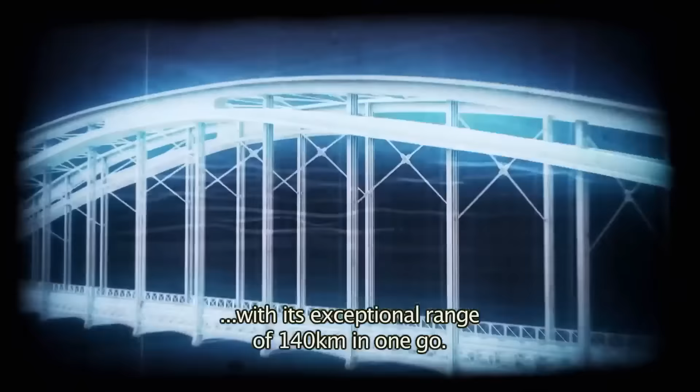The network has always benefited from the most innovative technologies. From the first wooden tunnels to chambers submerged in the Seine by freezing the ground, the construction, which began at the end of the 19th century, disemboweled Paris and boosted its performance.

As for the 400 trains, today they look nothing like the original wooden wagons. They are increasingly faster, more secure, automated and interconnected. The network has succeeded in its technological gamble and brought its historic lines into the modern age.

Today, the network continues to grow, but the building techniques have changed. The Paris Metro uses the most innovative methods to continue its growth. These include giant tunnel boring machines capable of digging more than 30 meters deep.

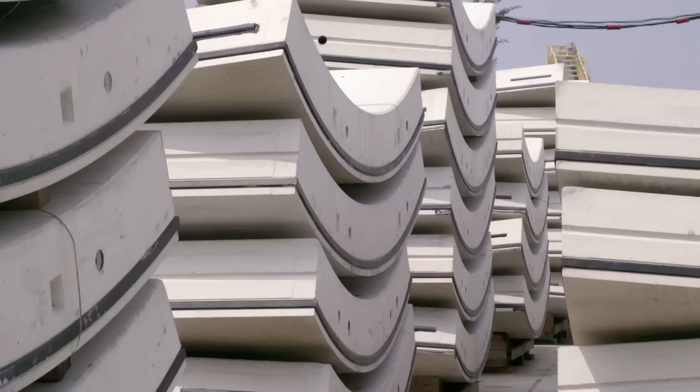We are in Saint-Ouen, on the site of the Line 14 extension, a titanic construction costing nearly €1.5 billion, situated in the heart of the city. Here, revolutionary techniques are used, making it almost invisible to the city's population.

The project will add 6 kilometers and 4 stations to the existing line, linking the Saint-Lazare station and the Mairie de Saint-Ouen station.

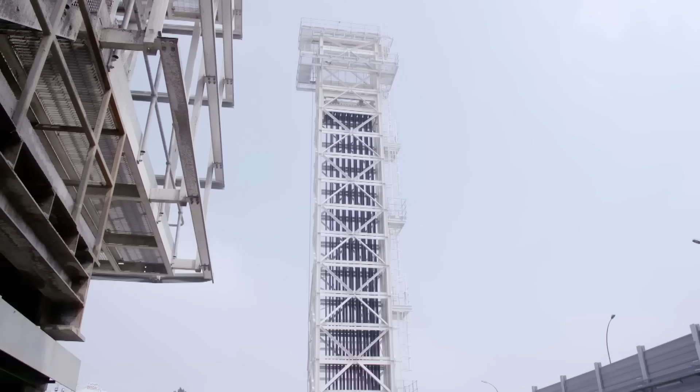25 meters below ground level, the tunneling machine, Seine, is hard at work. It has covered 400 meters so far. Its aim is to create a new section towards Mairie de Saint-Ouen station.

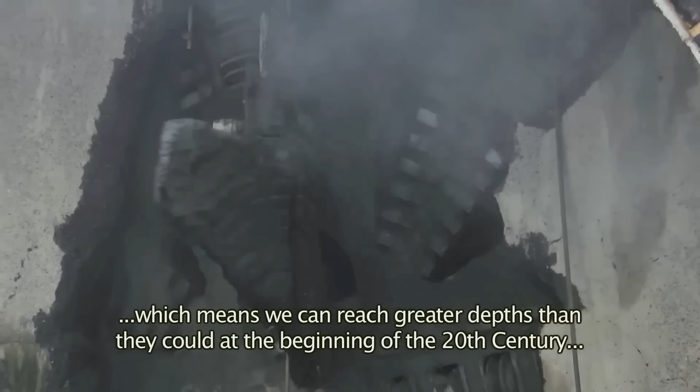Thanks to modern tunneling machines such as this one in Saint-Ouen, developed by a French company, the construction goes a lot faster and the workers have given way to machines.

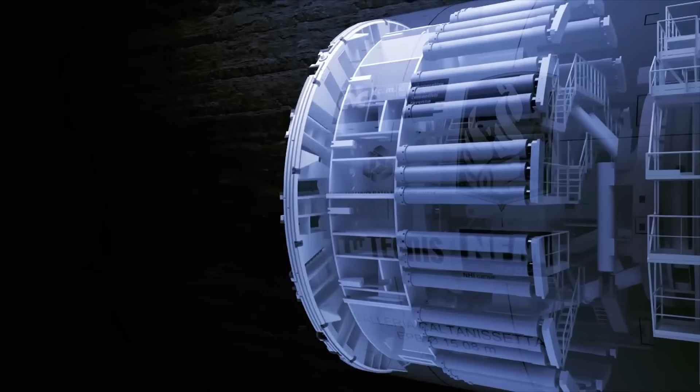The tunnel boring machine, at 100 meters long and 9 meters wide, is able to exert 7,000 tons of thrust against the wall it devours. Completely automated, the Seine can dig and construct the tunnel at the same time.

At the front of the machine, the head, equipped with its numerous teeth, operates on the rock exactly like a drill bit. The cutting head eats away at the earth. The rubble is then routed outwards with the help of an Archimedes screw, a giant feeder screw.

The debris, saturated with water, is carried outside of the site on a conveyor belt. Stored in a reservoir, it is then taken away in lorries.

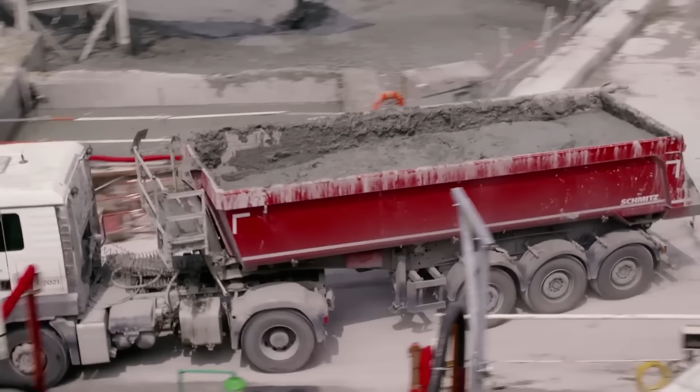At the same time that the earth is removed, the voussoirs which will form the tunnel walls are lowered into the starting well. They continuously supply the work of the boring machine.

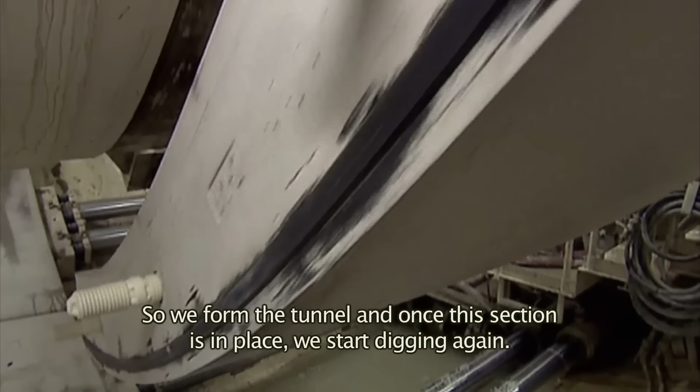Following the advancement of the tunnelling machine, a mechanical arm places the voussoirs one by one in a precise order. Assembled together, they will form the structure of the tunnel.

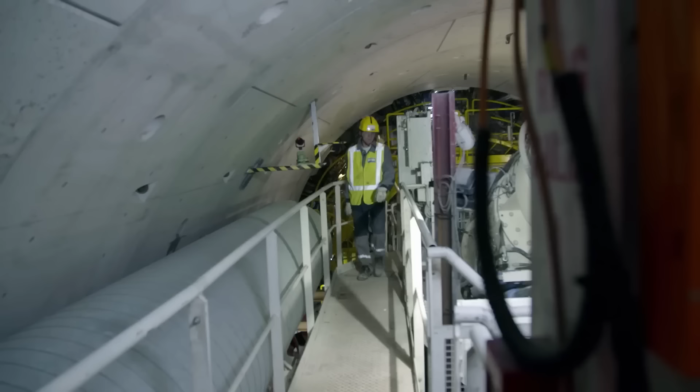The Romans used stone voussoirs to construct their arches. Like a giant puzzle, these prefabricated concrete parts weighing 6.5 tons fit perfectly together to form watertight walls. On this extension of Line 14, it will take 7 to form a tunnel ring.

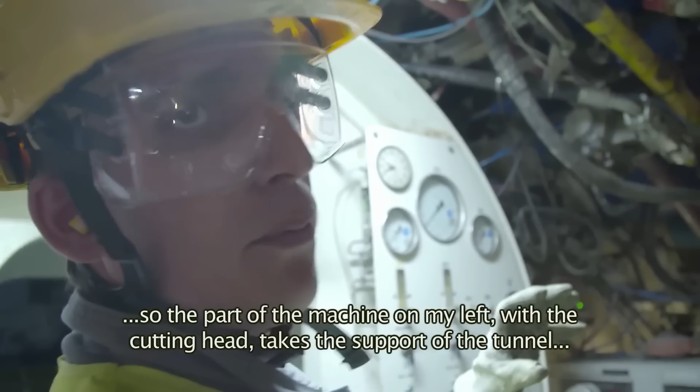No propulsion is required to move the machine forward. These hydraulic jacks allow the machine to lean against the voussoir that it installs and applies pressure which moves it forward. The tunnel boring machine at Saint-Ouen advances 200 meters a month towards its final target, situated more than 5 kilometers away.

The speed must be adapted according to numerous parameters, including the type of earth and the diameter of the borehole, similar to a drill that you don't want to overpower for fear that it might jam.

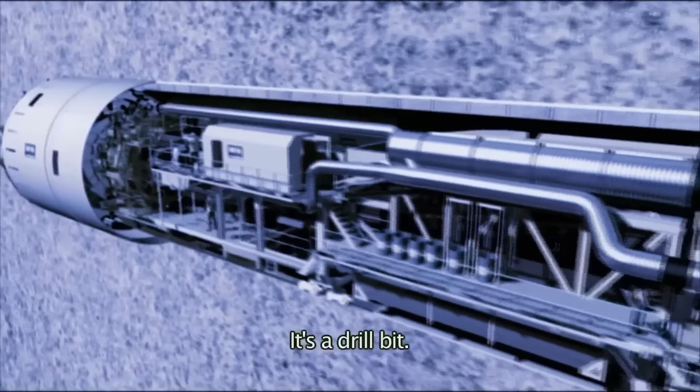We are far from the days of the horse-drawn buses which filled the capital and the 1900 World Exposition which saw the birth of the Paris Metro. Today, it is made up of 220 kilometers of track, 14 metro lines, 303 stations and more than 400 trains which run 7 days a week.

The Metro also has an unbelievable history which goes back nearly a century and a half.

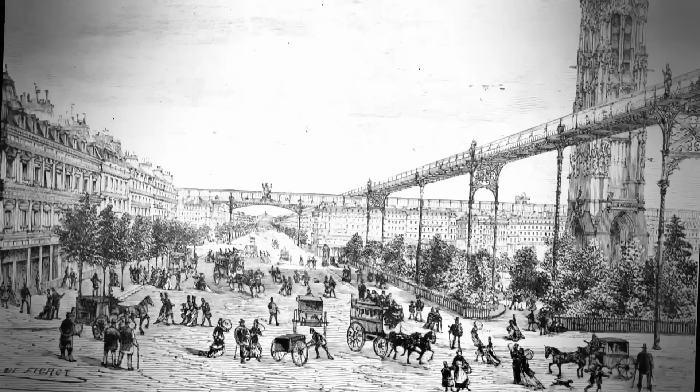This goes on for 40 years with no results. The Parisians will have to be patient.

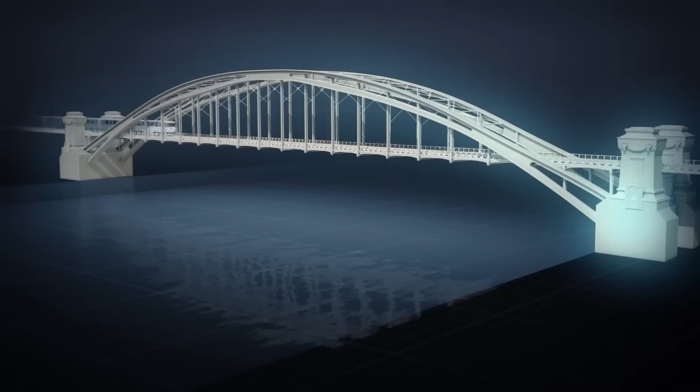As for the trains, they will be electrically driven and must not exceed the size of 2.4 meters, which would inhibit the running of normal trains.

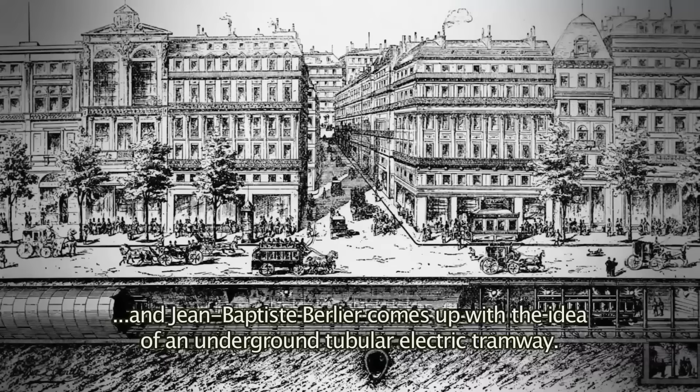Tramways have existed since the 1860s. First, there were horse-drawn tramways, then steam, and finally electric. The visionary Berlier imagines an underground tramway with a central rail which will provide the necessary electricity.

Finally, in 1896, a Parisian engineer, Fulgence Bienvenüe, is put at the head of the project. He is seen as the father of the metro. There is even a station with his name, Montparnasse Bienvenue.

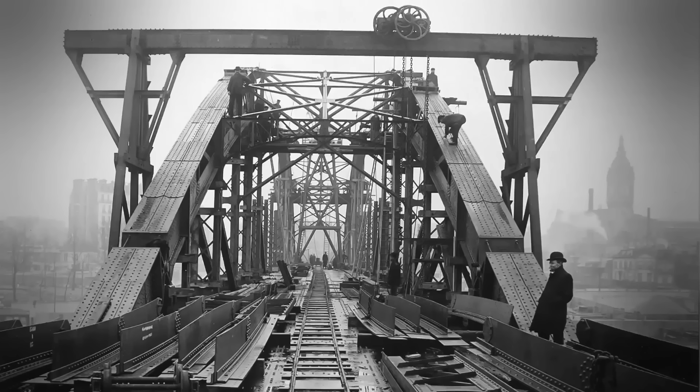In order to avoid interfering with river traffic, the navigation service demanded that it should have no supports in the middle of the river.

Situated 11.3 meters above the level of the Seine, the Austerlitz viaduct is made of steel. It consists of two large parabolic arches with three main joints, one at the top and two on either side near the riverbanks. The deck, which is 8.5 meters wide, is suspended from the arches by 16 supports in its center and 4 supports at its ends.

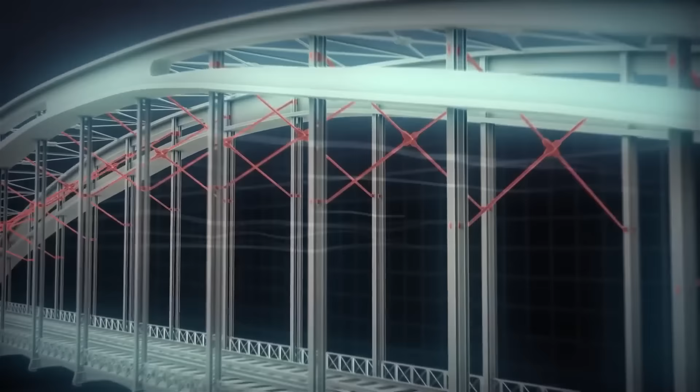To withstand wind force, the suspension supports are connected by crossed structures. To reinforce the structure, the arcs themselves are also connected together.

The selected project, therefore, outlined a viaduct with a single span of 140 meters, beating the 107.5-meter-long Alexandre III Bridge, which was until that point the longest in Paris.

On the banks, the viaduct arches rest on stone abutments, which are 22 meters long and 18 meters wide. Each of these blocks is surmounted by two 15-meter-high masts, which frame the deck of the bridge. A work that is truly extraordinary for its time.

In July 1906, the construction is finally completed. Line 5, which links Gare de l'Est to Gare d'Austerlitz, is in service.

It is one of 6 lines which make up the initial project, but already a second stage of works is planned. For the designers, the metro must be for everyone, and no person should be further than 400 meters from a station. It is for this reason that the first line to be constructed consists of 18 stations for only 11 kilometers of track. It is the transversal line from east to west, which departs from Porte de Vincennes to join Porte Maillot. It runs along the Seine for nearly half of its length.

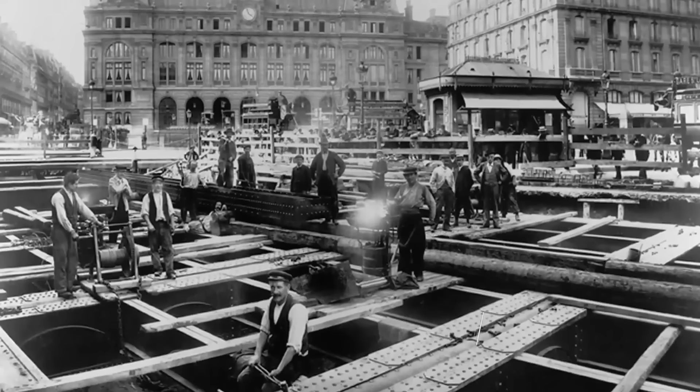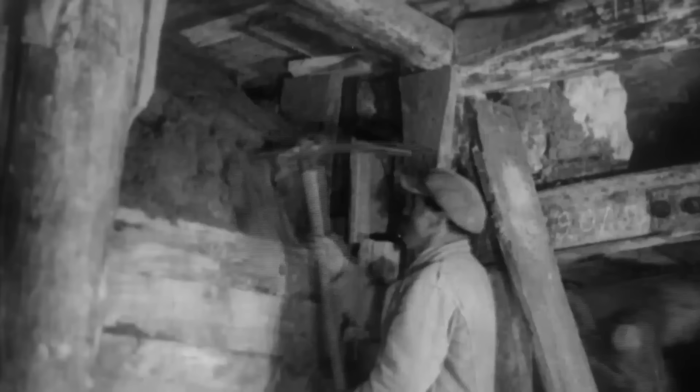This technique is used by all contractors in the construction of railway tunnels in particular. As in the mines, the digging is done by hand with a pick and shovel, grueling work carried out in extreme conditions. All the rubble is removed from the tunnels in wagons and transported to the surface. Some is used to refill Parisian quarries. As for the shafts, they are supported by enormous wooden beams, which also serve to create the shape of the future tunnel. Finally, still by hand, the vault is constructed from stone blocks, a work worthy of the construction of the pyramids.

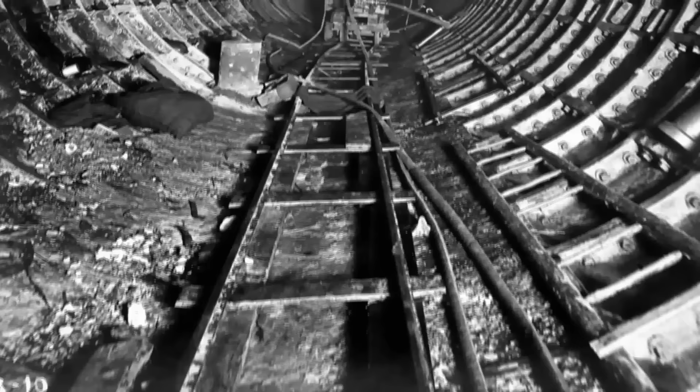In reality, the metal shield would not be used much on Line 1 because it is very slow, difficult to put in place, and stops as soon as it encounters a rock that is too hard. At the time, it was even sometimes necessary to dig by hand to move it forward in waterlogged terrain. These are the voussoirs placed one by one to create the tunnel ring. They are cast iron and positioned using a manual system. They give the tunnel its final shape. The shield concept truly is the ancestor of the modern tunnel boring machine, but this technique will take decades to be properly developed.

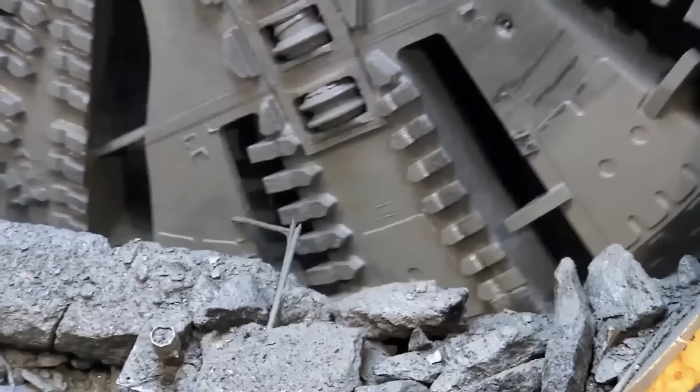It will take a century for a tunnel boring machine to be used again in Paris.

Today, it is hard to imagine the busy Rue de Rivoli in this state, and yet it is the hell that Parisians will live with for 18 months.

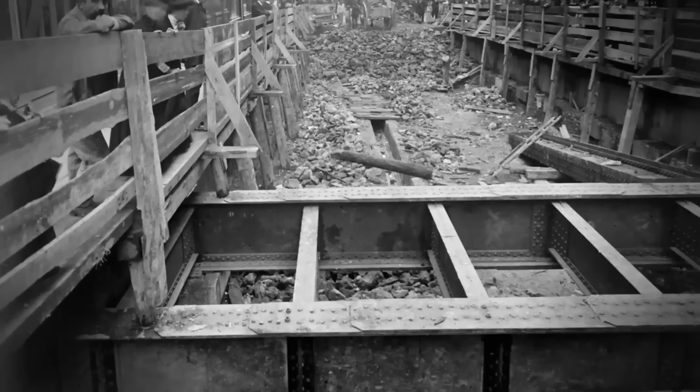This technique will be used near the Seine. Dug as shallow as possible to avoid leaks, the top of certain stations is sometimes only 60 centimeters from the wheels of the cars passing above.

The most advanced technologies were used in the electrification of the network. 2 coal factories were built to provide enough energy for this new means of transport. This requires colossal investments which already combine public and private money. It is the CMP, owned by Baron Empain, one of the financial giants of the 19th century, who takes on this formidable gamble.

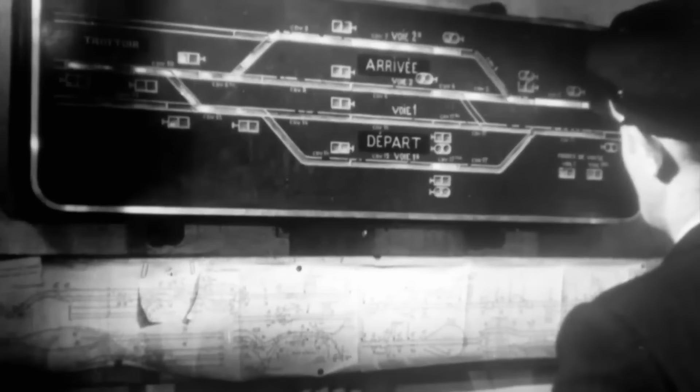A delayed reaction, which is not very reassuring for the passengers. To answer growing concerns about safety, the RATP implemented centralized command posts, a revolution made necessary by the growing development of this megastructure. In 1967, Line 1 is one of the first to be equipped with a centralized command post. 50 years later, it is the most modernized command post in the Parisian Metro.

With nearly 275 million people transported a year, the role of the Line 1 command post is paramount in order to respond to every situation as quickly as possible.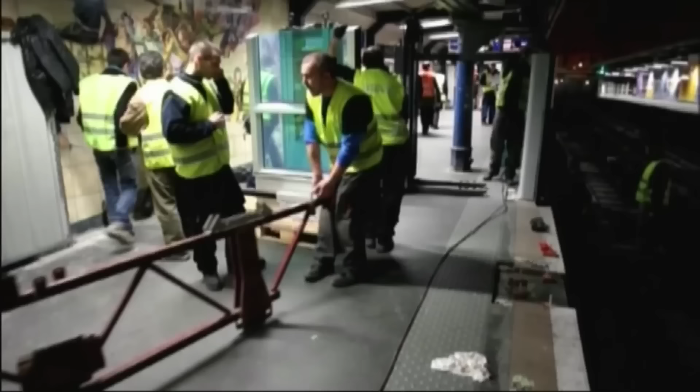In 2011, to better meet a growing demand, the traditional metro with a human driver is replaced by a completely automated line. The work was done at night without major interruptions to traffic. It was a world first.

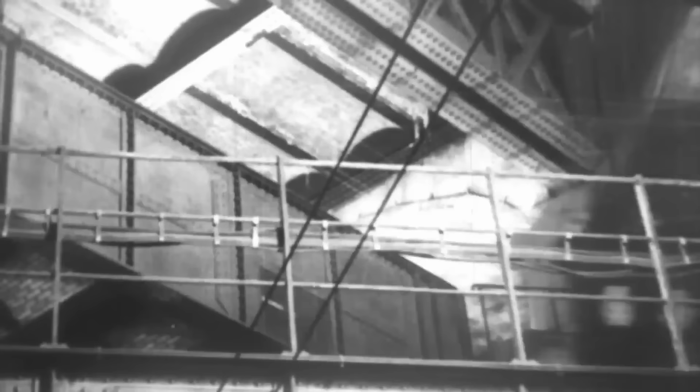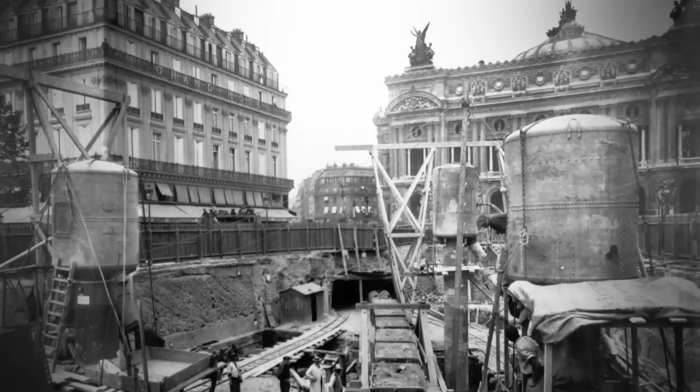Until now, Léon Chagnaud has only dug a few tunnels on lines 2 and 3. He owes his fame to the former. On it he will test advanced techniques and become one of the more important builders of the Paris Metro.

Thanks to this success, he will be entrusted with an even more unbelievable mission: the first crossing under the Seine River, between the stations Châtelet and Cité.

These two stations make up part of Line 4. Around 11 kilometers long, it leaves from Porte de Clignancourt and runs all the way to Porte d'Orléans.

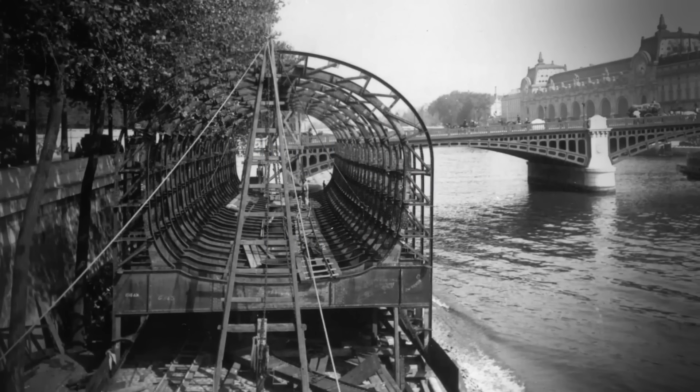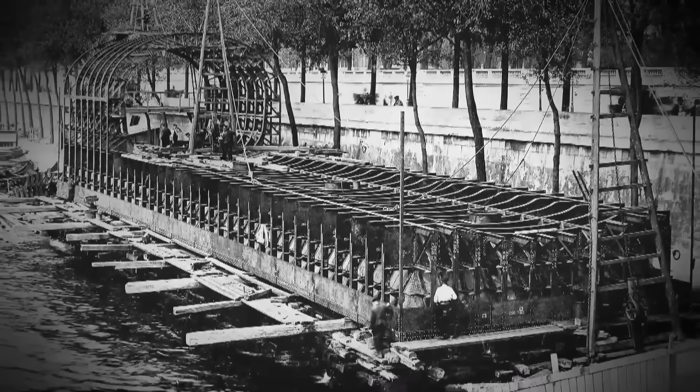They decide on chambers buried in the riverbed. Construction begins in 1905 and promises to be spectacular. There will be 3 large chambers for the larger branch of the Seine, covering 122 metres, and 2 for the smaller branch at 41 metres. The 5 chambers, which will be submerged in the river, will be assembled on the Quai des Tuileries, where the engineers will create their innovations.

Each chamber is composed of a cast iron base housing the two future tracks. The whole structure is surrounded by a double-layered wall made from metal. The chamber rests on a base shaped like a knife blade, 1.8 metres high. Between the two walls is an empty space, which will become a workspace where the builders will operate.

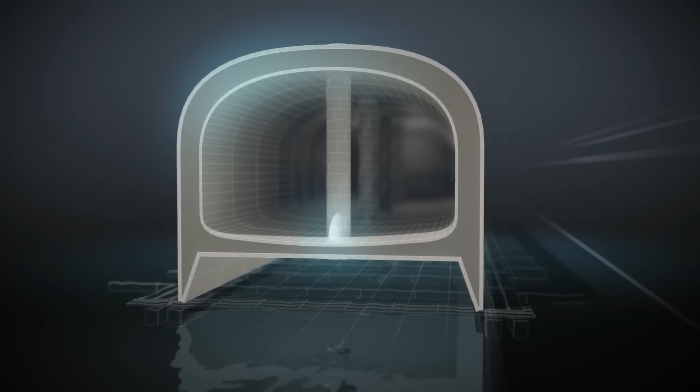The chamber, which floats on the Seine, is then towed to its future grounding place. After finding its ideal positioning, concrete is injected into the metal double wall, creating a watertight sarcophagus. As promised by the contractor, the construction site, despite its size, manages to avoid interference with the swallows and their passengers passing along the Seine.

Under the weight of the concrete, the chamber falls gently. Once in place, the water inside the work chamber is pumped out. The main chamber is weighted down to keep it in place at the bottom of the river.

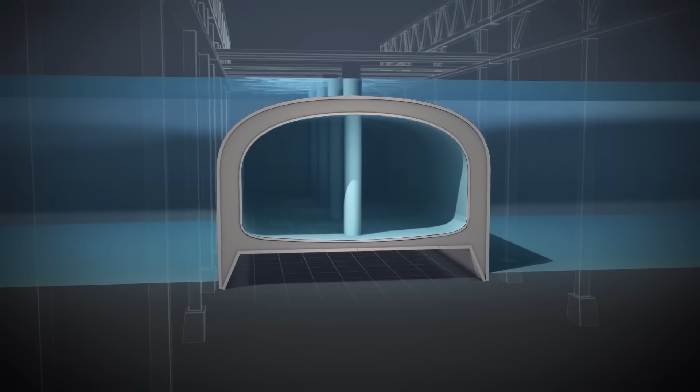Through chimneys, compressed air is sent into the work chamber, increasing its watertightness and allowing the builders to go down and dig under the metallic structure in order to sink it to the desired level. Working in extreme conditions, these specialized builders, called tubists, must, like underwater marine divers, make decompression stops when coming back up from the work chamber, 15 meters below the surface.

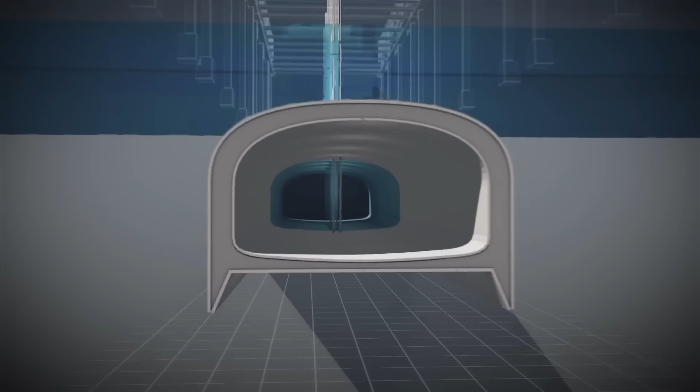Thanks to the work of these capable men who took on this risky work, all the chambers of the same section were finally lowered to the right level on the bed of the Seine. They are then joined together to form a single tube. The work chambers are filled with concrete and the trench is filled to ensure the structure is blocked in. The tunnel is complete. The water is then pumped out and the workers can finally access it.

This part, the most dangerous, will take place without any major problems, but the same cannot be said for the chamber under Île de la Cité.

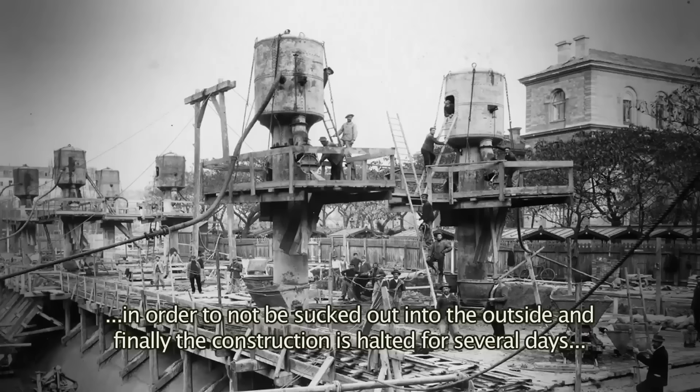The pressure is so high in the chamber that they were ejected outwards like the passengers of an airliner whose door would suddenly open mid-flight.

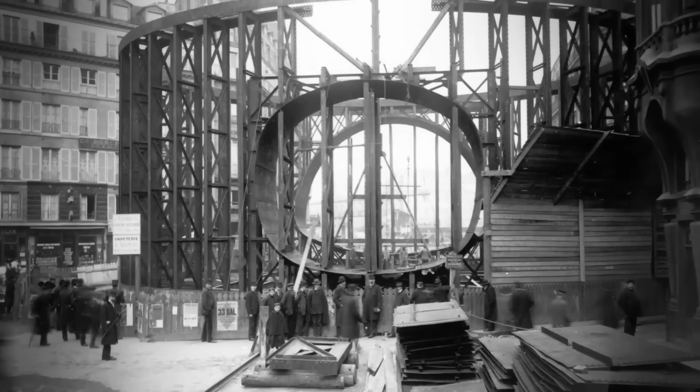The stations Cité and Saint-Michel, situated on the mainland, must also be buried. Once again, the sinking technique will be used and the builders will go down into the work chamber to pick away the waterlogged earth from below. A colossal job, especially when you see the images of these enormous steel hulls that gradually disappear into the ground.

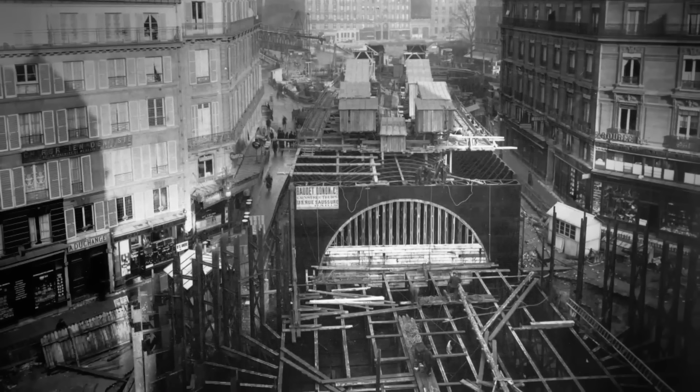But the construction is not finished. A new difficulty stands before Léon Chagnaud. They have to pass beneath the railway line connecting Austerlitz and Orsay without it collapsing.

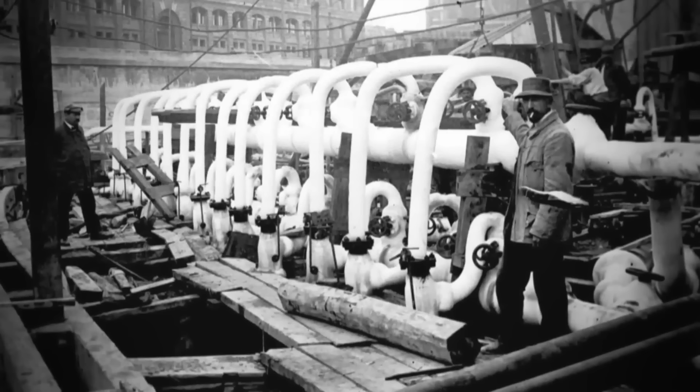This freezing technique makes it possible to carry out dry work in water pockets and so enables the digging of more stable ground. For this, 2 refrigeration plants were built along the Seine. From there, pipes circulated salt water cooled to minus 24 degrees.

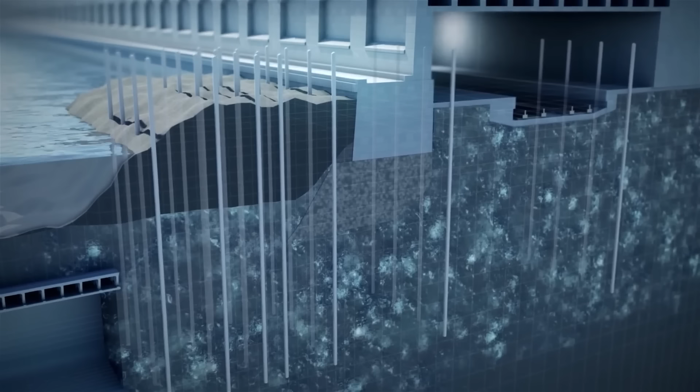The digging shaft passes beneath the railway line, which links Austerlitz and Orsay. So that the tunnel works did not endanger the tracks, the ground is frozen by inserting 24 refrigerated pipes, which went 14 meters deep. The volume of earth to be frozen is considerable, more than 2,000 cubic meters. This technique is so expensive and so complicated to develop that finally only 14 meters are treated.

After 40 days, the ground is sufficiently frozen. The freezing works so well that the builders, who work with picks, have difficulty digging. The work is reaching the limits of what humans can achieve, and the construction can only take place at night when the trains do not run.

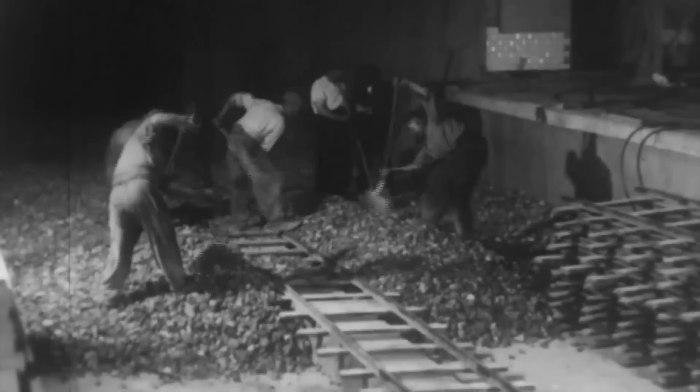In 1909, after 4 years of hard work, the gargantuan construction of the Seine crossing is complete. Up to 700 workers were employed at one time. The General Inspector, Fulgence Bienvenüe, comes to inspect it. His dream has become a reality.

2 years later, elevators are installed which give access down to Cité and Saint-Michel stations, situated far below the surface of the Seine.

On the eve of the First World War, nearly 40% of the network was already built, making up 90 kilometers of the 220 kilometers that exist today. In 1939, 160 kilometers are in service. At this time, the metro already carries 500,000 passengers. Over the following years, 60 kilometers will be added to the lines to complete the network.

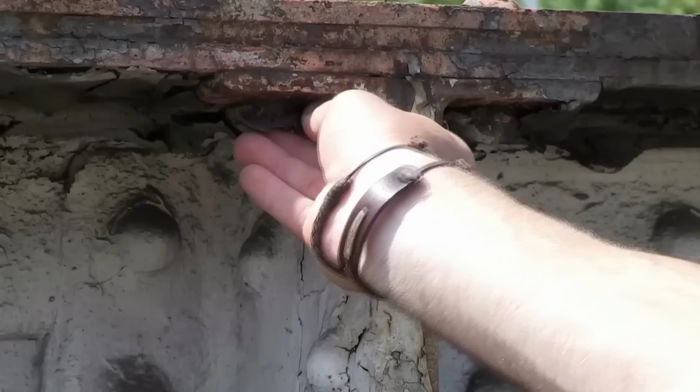Today, the 14 existing lines are subject to wear and tear and various incidents. This enormous structure is therefore constantly monitored, and everything possible is done to keep the lines running. Some, built at the very beginning of the 20th century, are totally renovated, respecting the spirit of their unique heritage. This is the case particularly of the aerial lines, whose metal structures have for decades met the expectations of the engineers who designed them.

This is why the metro, now indispensable to Parisian life, never completely sleeps. Each night, 2,000 agents work to maintain the tracks which zigzag through the bowels of the city. The RATP workers must work fast, as they have to leave their work sites before 5 o'clock in the morning.

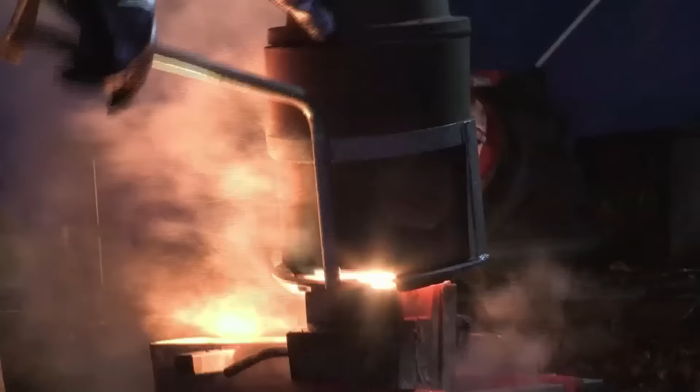Technicians today still use techniques developed by generations past. To assemble the rails to be replaced, they are welded together with the help of a sort of small portable foundry. This is a technique used even in the 1930s.

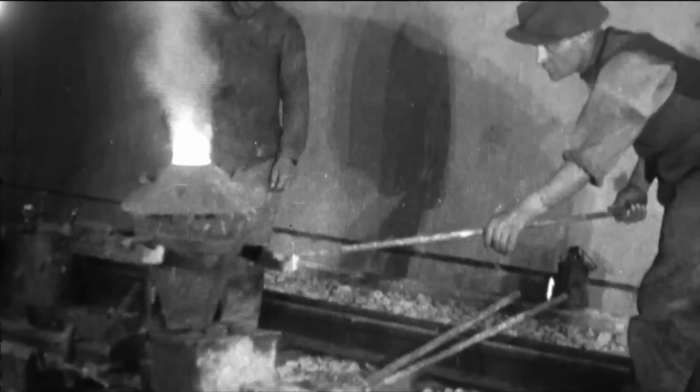The hundreds of metro trains travel tens of thousands of kilometers each year, requiring colossal maintenance.

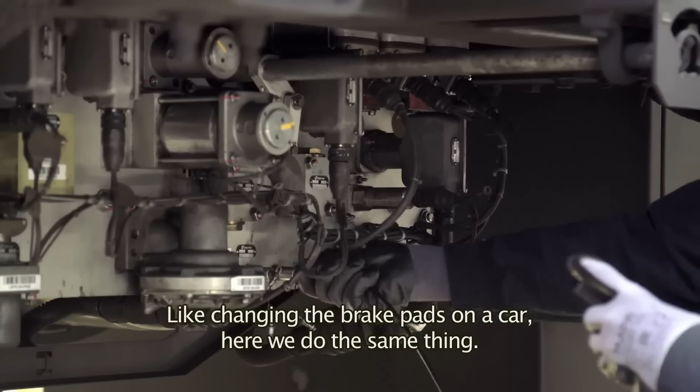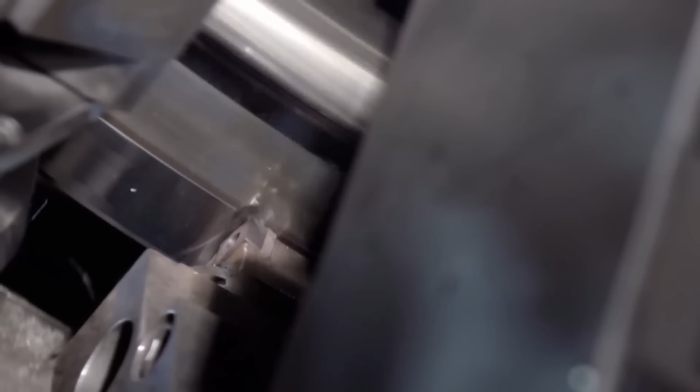Like with car tyres which wear out and become misshapen, the metal wheels of the metro trains require a reprofiling every 200,000 kilometres, or 3 years of use. It is a way of improving the comfort of the passengers and also ensuring optimal safety by gaining adhesion.

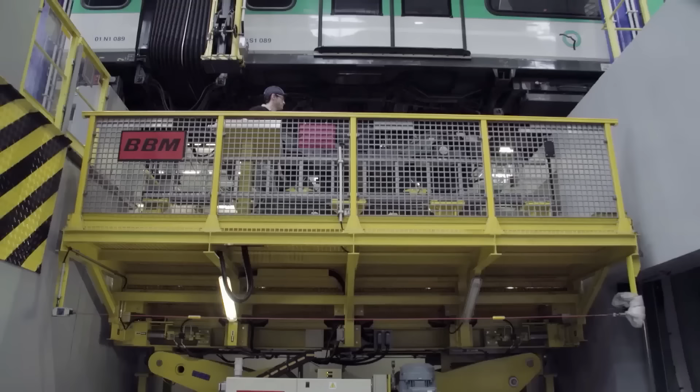Here the cars are checked from every angle. One of the main advantages of this state-of-the-art workshop is the possibility of working on the bogies, which include the engine, the undercarriage and the axles, and which weigh more than 7 tons. Huge hydraulic cylinders separate the wagons from the bogies, an exceptional system which allows them to be repaired or changed.

It is a long way away from the manual workshops 50 years ago, where adjustments took forever. Technology has revolutionized the RATP maintenance workshops. But today, like yesterday, nothing is left to chance here.

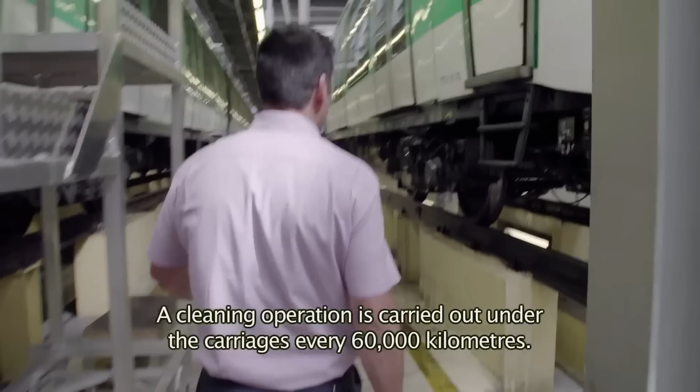An operation that is required to facilitate the technician's diagnostic, who check each part, and also to avoid any possible accidents where the oil might risk setting on fire due to the heat.

There have been few fires, sometimes with unexpected causes, since the metro opened. The most tragic took place just after a few years of use, on the 10th of August in 1903.

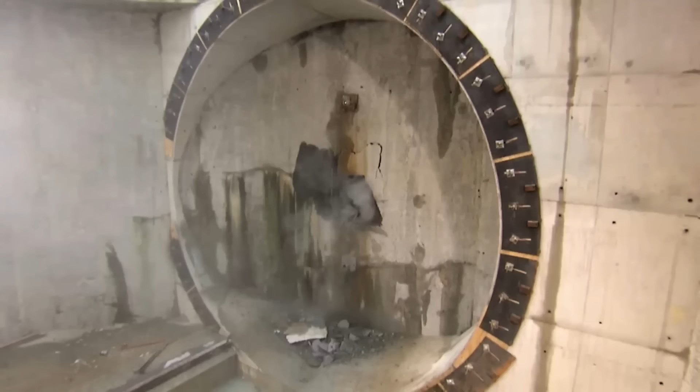Constructing this line, which crosses Paris from east to west, from the 8th to the 13th arrondissements, is a new challenge because it must pass beneath the belly of the city, its car parks, its underground networks, its buildings, and even the Seine. For this, it will use a revolutionary technology, the tunnel boring machine, a gigantic construction site which will last 5 years and require double the amount of steel than was used for the Eiffel Tower.

Line 14 is the 7th line to cross the Seine between the stations Cours Saint-Émilion and Bibliothèque François Mitterrand. 90 years after the first operation to pass under the Seine, chambers will once again be used in this crossing, but this time no one's life is at risk. Gone are the days where men work under the huge metal structures.

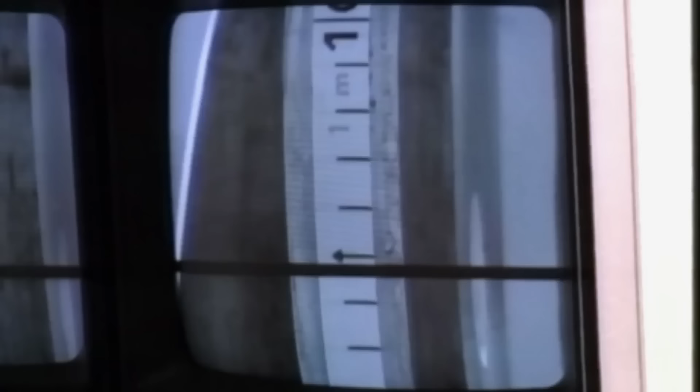Excavators with giant arms are used to make a huge trench, 14 meters wide, in the riverbed. The 4 chambers are 34 meters long, 6 meters high and 9 meters wide, and made of prefabricated concrete. They are constructed directly on site. Submerged slowly and under heavy surveillance, they are then directed towards their grounding site.

Positioned in line with the trench, the chambers disappear into the Seine, reaching their final placement. They are then covered with earth. Joined together, they form a new passage under the Seine.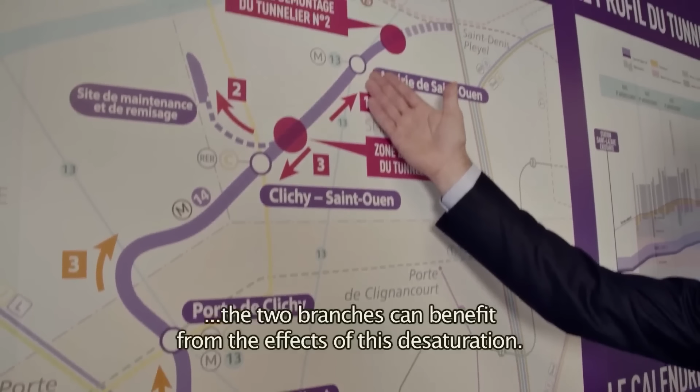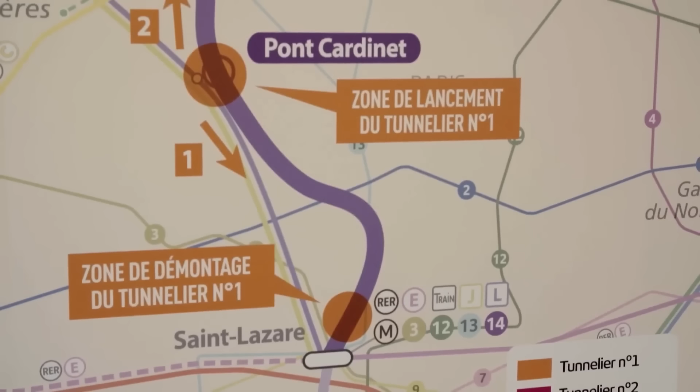But to achieve this goal, the contractors will have to overcome new obstacles, starting with avoiding existing metro lines. They will have to dig very deep using the tunnelling machine, which will descend 30 metres below ground level.

At these depths, new challenges await the engineers. The ground to be dug is relatively loose and does not pose a particular difficulty. However, the route is situated beneath the level of the water table. The contractors will have to combine technology and ingenuity.

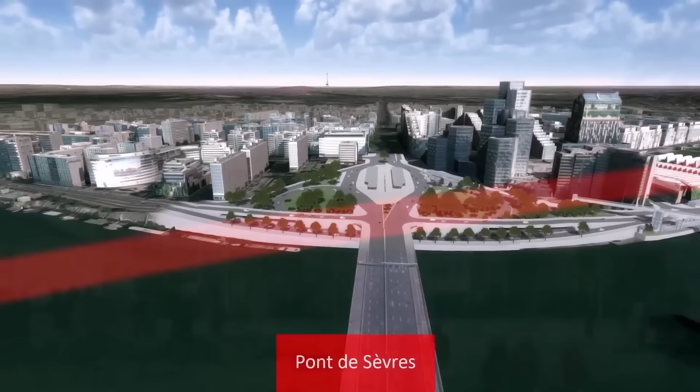A circular network for skirting around Paris and saving time. For the Line 15 South, which will link the west and the east of Paris without passing through the capital, 13 architects have designed 16 new stations. They no longer seek to hide them. They are thought to be true living spaces, making their mark on the heart of the city.

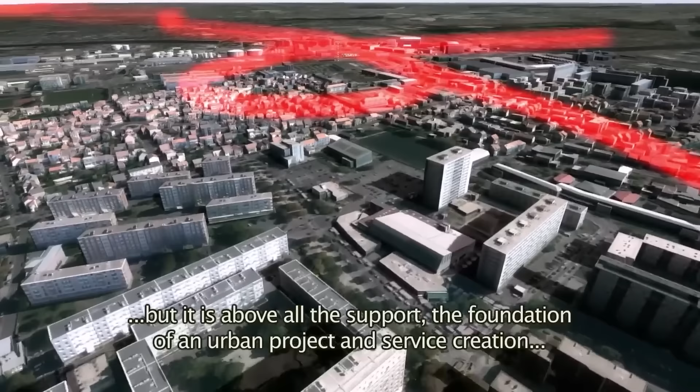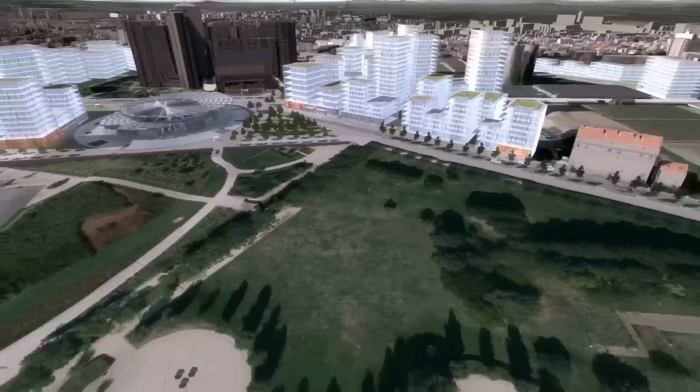The first works have begun, and Line 15, which will surround Paris, will be completely finished in 2027. But this is not it, as numerous extension projects on existing lines have already been planned. The network must respond to the growing Parisian urban area, but also to its usage, which increases by 3% each year, to soon reach 1.5 billion passengers transported.